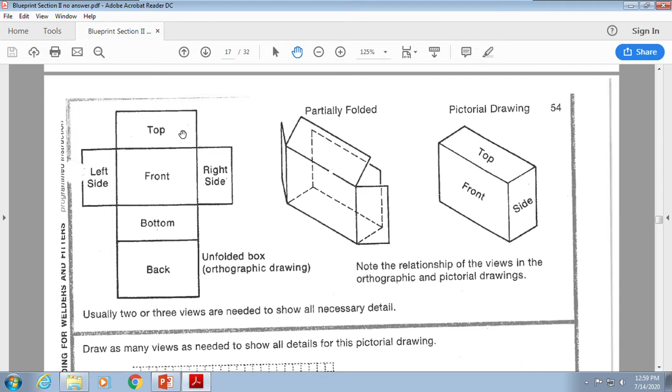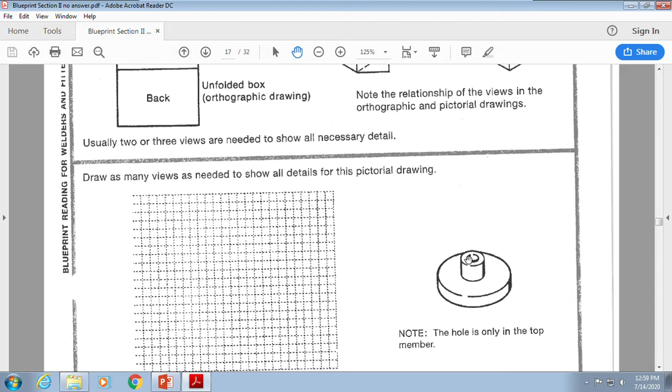And a top and a bottom and the back of things. They're going to give as much information as necessary. Okay, so we want to draw as many views that are needed for this drawing. So really, I want you to look at this, and, okay, so what would be the first one? My top. So what's the top going to look like? This and this, and don't forget the little hole on the top of this one, okay?

And what's my front and side? They're probably going to be pretty much the same, right? So we're going to show this, right, and this. So the curves you no longer see, so they become straight edges, okay? But there's something important in here that we need to include. What is it called? It's called a hidden line.

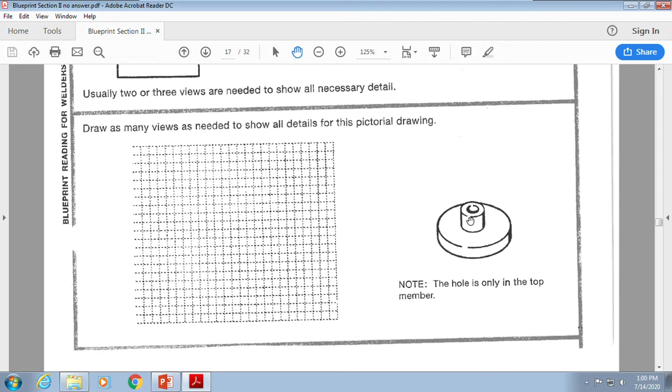A hidden line is a series of dashes that shows that there's something under here like a hole. Okay, so a hidden line has dashes, and it's going to show that there's a hole in this top member. So when we draw it, we're not only going to draw this square like this, and this square like this, we're also going to put the dashes here and here next to it so that we can show that there's a hole.

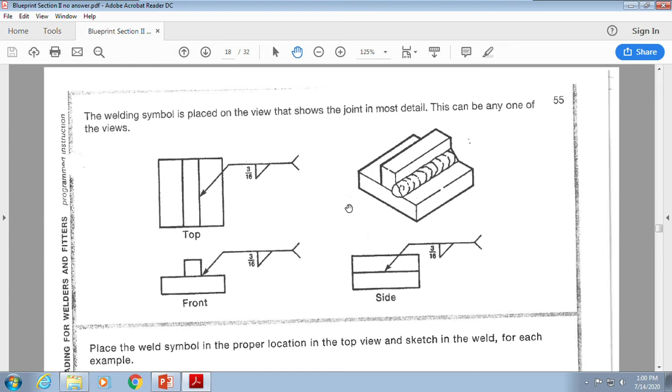All right, so here it is. It says the welding symbol is placed on the view that shows the most detail. It doesn't have to be all of the views, but it can be one of them. Now, this is a T-joint, and here's where the weld is, okay? So look at the top, the front, and the side views. Now, it's all the same information, but it can be very confusing when we look at it, okay?

So it says, put the weld in the proper location and draw it. Okay, so where is the weld going to go, and what does it look like? Okay, so the next one is really important to understand. Looks can be deceiving. And every once in a while we're all suckered by this because we don't look at all of the information. It's really important to look at all of the information that's given.

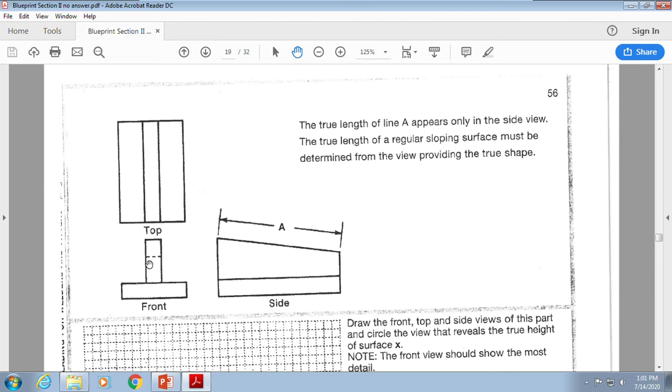If I really just looked at the top and the front, I can see that it's just a T-joint, right? But if I didn't look at that side view, I would not understand that that top is slanted. And it shows me a hidden line right here, which shows me that there's an edge here that we're seeing across. So this is that top edge, that's that hidden line, okay? So we need to make sure we understand that shapes can throw things off.

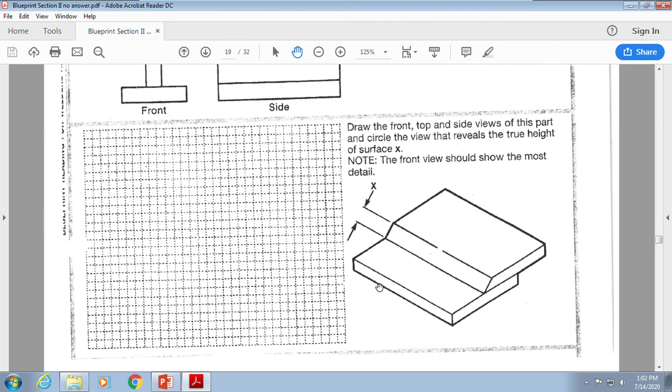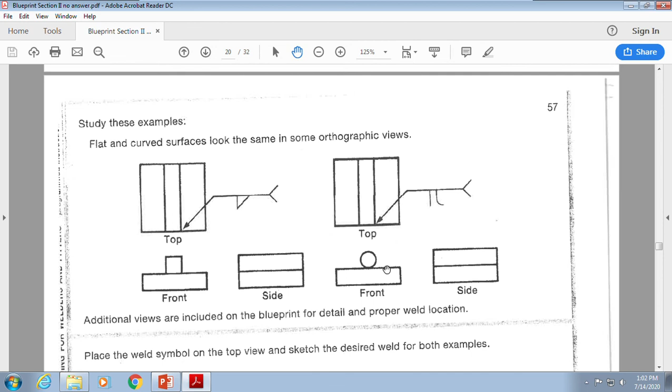So they want you to draw a top, a front, and a side view, and they want you to show with an X what would show this bevel here. How can I show that, and how would I show it correctly? All right, here it is. So as we can see, looks are very deceiving. T-joint, right? Fillet weld. Single flare bevel. Circle or round to flat. Everything's the same, except instead of having a square piece, we have a round piece. So it can really throw us for a loop.

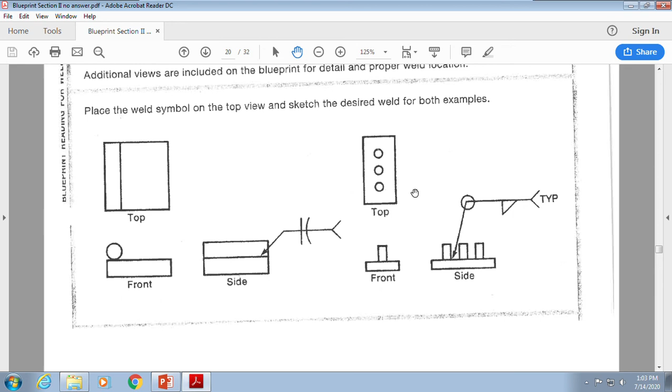So it says place the symbol on the top view and sketch the weld for both. So you guys need to understand, what is it going to look like? What's going to happen here? When it says typical, it means I have this as a fillet all the way around, which means if I have this piece like this, typical means I'm going to do it to all of those pieces.